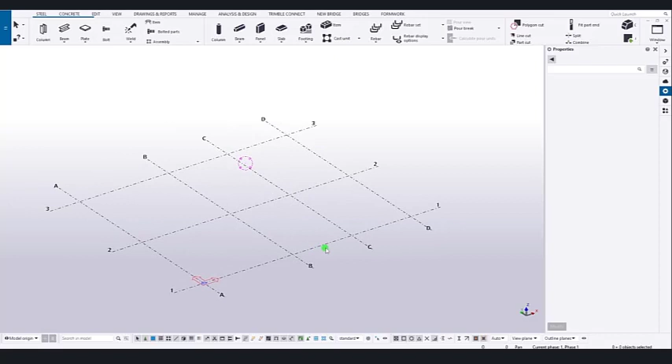Create grid for project. If you open Tekla Structures, you will get this rectangular grid by default. You can customize this grid. Select the grid, then go to the properties. You will get the grid properties.

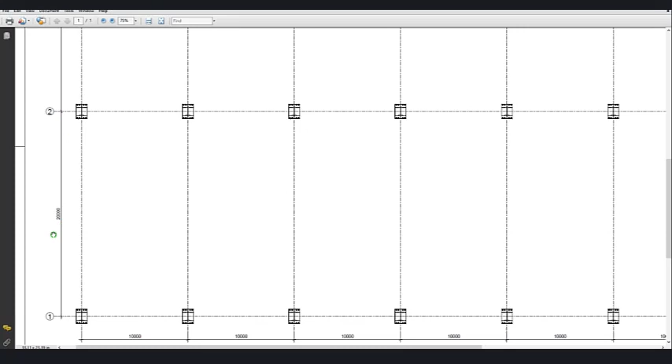Now go to the PDF. You can see the grid and all. You can see here this is X direction. Here it is Y direction. X direction, the distance between each grid is 10,000 millimeter. Here in Y direction it is 20,000 millimeter.

First, we need to make this. You can see here the grid naming is A, B, C, D like that. Here it is 1, 2, 3 like that. So first go to here. This is X direction. We have 7 grids, means we have 6 spacings.

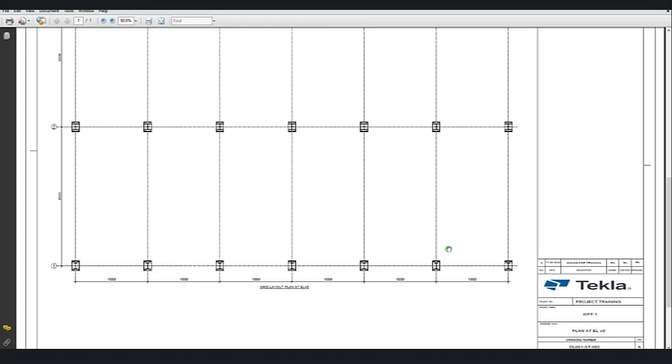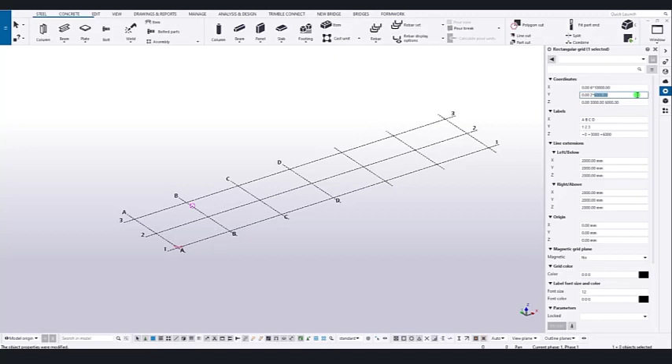So now go to Tekla Structures, delete all these things, then make it here 6 spacing, then star 10,000, then enter. So X direction is created. Then Y direction. In Y direction we have 2 grids. The distance between the 2 grids is 20,000, enter. Now X and Y are finished.

Next one Z direction. For Z direction, if you go to this one, you can see here 0 elevation. Here it is 7,000, 9165. Then here it is 10,000 elevation. Now go to Tekla Structures, make it this one

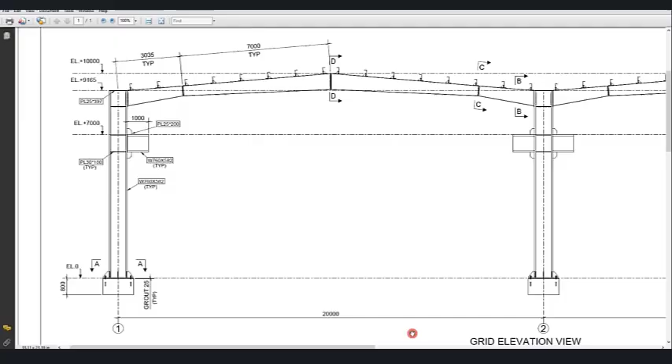7,000 elevation, then 9165. We can check that one, 9165. Next one 10,000, 9165. Next one 10,000, then enter. So here it is placed.

Same like that we need to make changes in this also. You can see here up to D we have E, F, G. We need to make it in X direction E, F, space G. All the letters need a gap in between. Once you are done, simply enter, or you can click this modify, it will modify. Here it is enter, here it is finish. Next 1, 2, 3, here also it is created perfectly in Y direction.

Next one Z direction, make it first level 0, next level 7,000, next level make it 9,165, then give a space, 10,000, make it plus symbol also. So now all these levels are finished: 7,000, 9,165, 10,000. Then keep all the other things as it is.

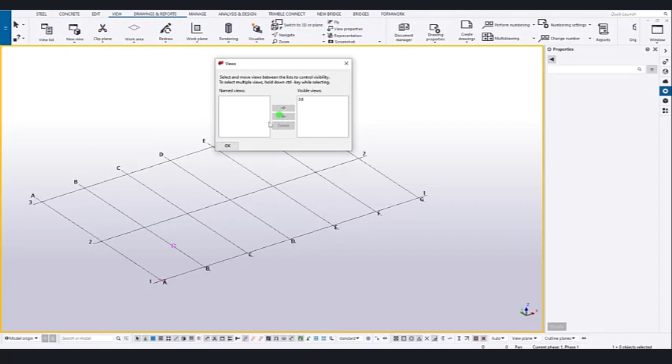Now just go to the view, then go to the view list. Here it is empty. Double click outside. You can change the name. You can make it 3D or you can make it isometric view, whatever you want. Then modify. Here it is. Change the name.

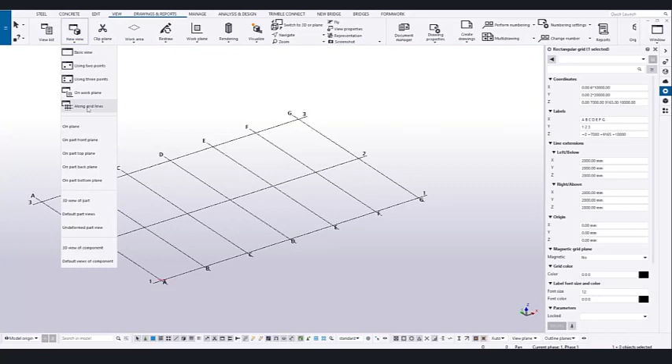Next, select this grid. Then go to the view. Then go to the new view. Select here along grid lines. Then create and click OK. Here all the views are created. Now I just close this one. So this is the way you can create grid for this project.

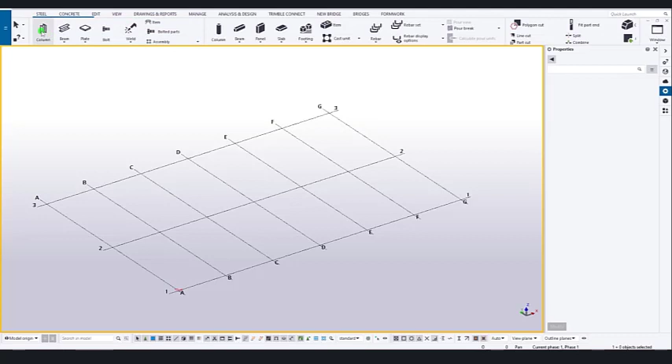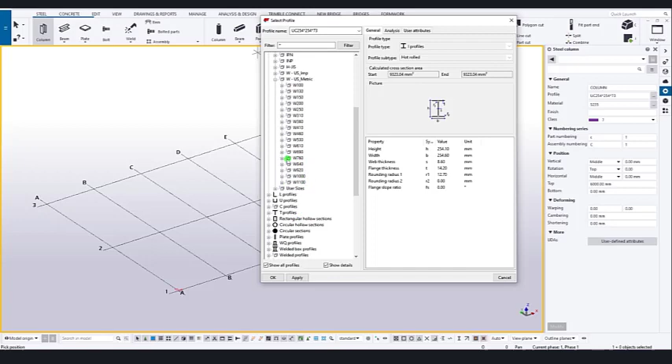Create column. For that, go to steel, then click the column, then go to the properties. We need to change all the things. Name just keep as it is, but we need to change the profile. If you go to the PDF, you can see the profile W760 into 582. Now just go here, then go to W section, and here it is I, and here it is WUS metric, and here it is 760, here it is 582. Select this one, double click this one, and here it is placed.

You can change the material also, whichever material you want, and whichever color you want, you can fix that. Next, this is the part numbering, make it H, and here it is column, so I just make it here CL. Then keep all the other things as it is, then enter, click the location. Before that we need to do one more thing also.

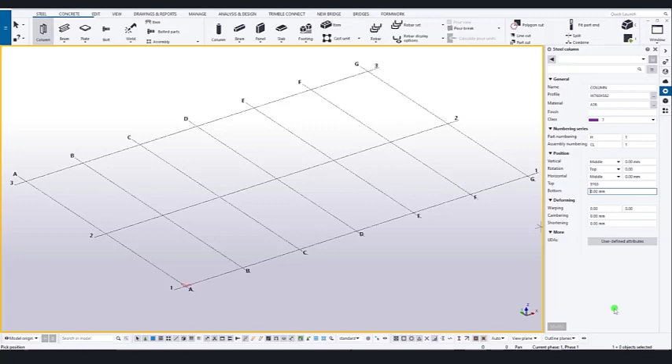Just go to the PDF. You can see this is the column bottom elevation. Here it is top elevation, top one 9165. So just make it 9165, enter. Keep all the other things as it is, then click the location and here, but we need to change the orientation of this column.

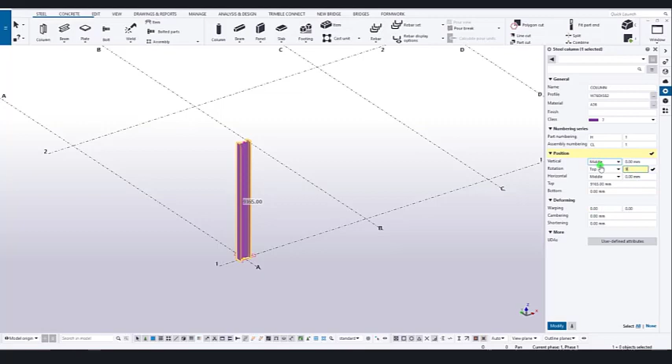Here if you go here you can see our flange side is this side, so we need to change that one. We need to rotate the flange to that side. Select this one, just make it here 90, then enter. Now you can see it is placed perfectly. Again go to column, just click the location, it will place perfectly. Expand. So now all the columns are placed.